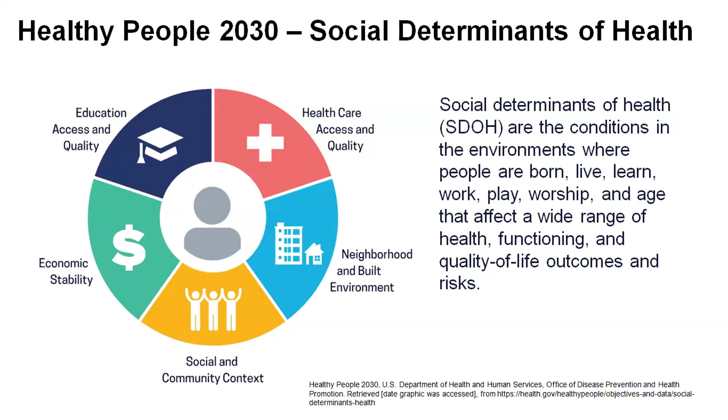buildings do not exist in isolation. They do impact the quality of life, outcomes, and risks. Buildings need to decarbonize to reduce greenhouse gas emissions, mitigate climate change, and improve health and well-being. We need to act for climate, and also we need to act for health. It's an economic, environmental, and regulatory necessity.

Acting on that reduces carbon footprint, mitigates climate change, lowers energy costs, and enhances property value. It keeps us up to date with increasing policies and mandates like green building certifications and building performance standards. It also impacts health and comfort. Green buildings improve indoor air quality and occupants' well-being.

So what does it really mean when we say we need to decarbonize buildings? Decarbonization is defined as the process of reducing carbon emissions from buildings, both operational and embodied. Embodied carbon refers to CO2 emitted during the manufacture, transport, and construction of building materials, plus end-of-life emissions.

While significant progress has been made to understand how to reduce operational emissions, our industry is getting more and more successful at making efficient buildings. There is still a gap in our knowledge and effort toward reducing embodied emissions. Unlike operational carbon, which can be reduced over time with energy-efficient renovation and the use of renewable energies, embodied carbon emissions are locked in place as soon as the space is built.

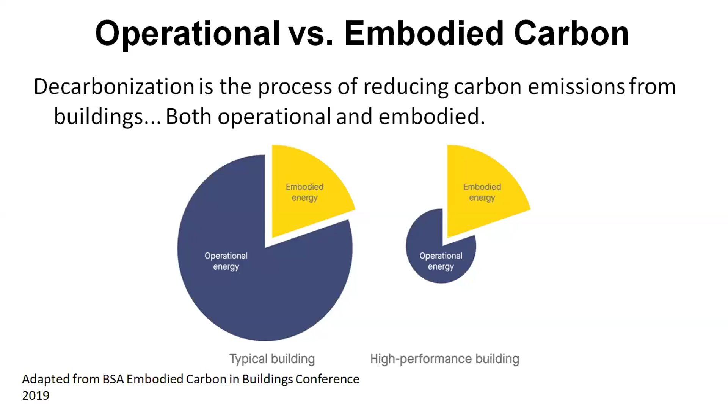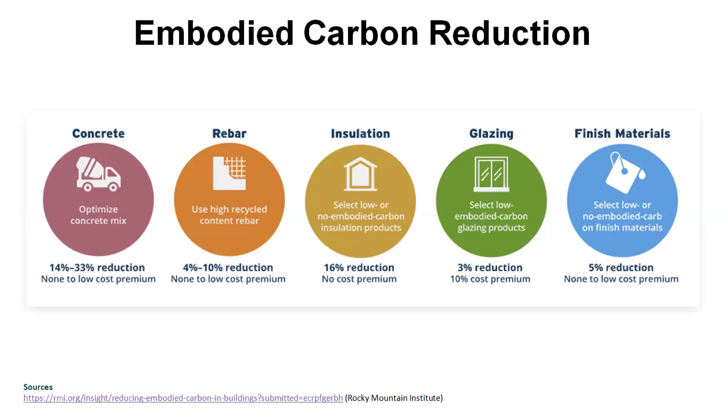Embodied carbon reduction can often reduce material use and project costs, reduce energy consumption in raw material extraction, manufacturing, and transportation, help to meet green building certification requirements, and better position building owners for future code or policy changes that incentivize or require low embodied carbon.

An example of embodied carbon and high impact material could be the three materials that have high impact: concrete, steel, and aluminum. They're responsible for 23% of global emissions. Most of it is used in the built environment.

Here we have an example of different options where we can select different types of insulation that can also impact the embodied carbon of the project. So we can do that through policy design, material selection, and specification. We can guide the built environment to have lower embodied carbon.

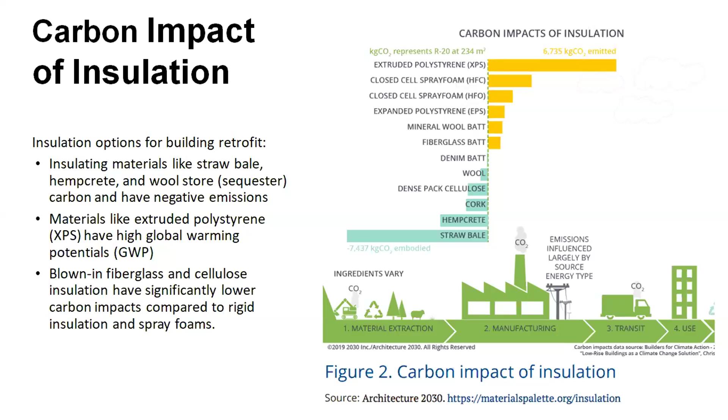Now that we've explored what embodied and operational carbon are, let's talk about how we must act urgently and strategically. And why are we talking about this in the first place? Why do we need to call for this action? Buildings account for almost 40% of global CO2 emissions. That's a huge percentage. We can't meet climate goals without drastically improving how we build and operate our spaces.

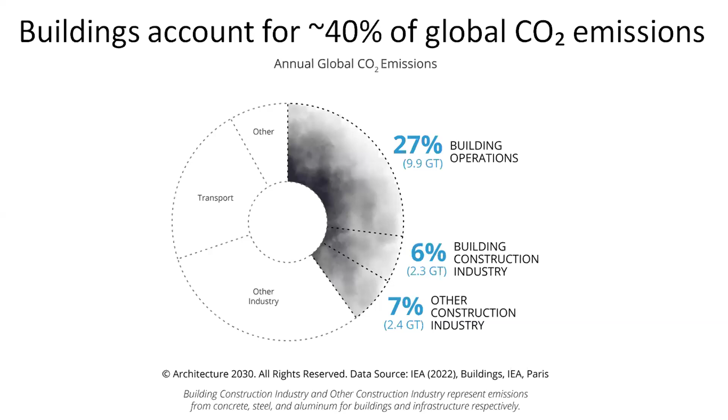Here in Chicago, buildings account for 70% of our greenhouse gas emissions. Nationwide, energy use is the biggest contributor. If we're serious about net zero, buildings must be the focus.

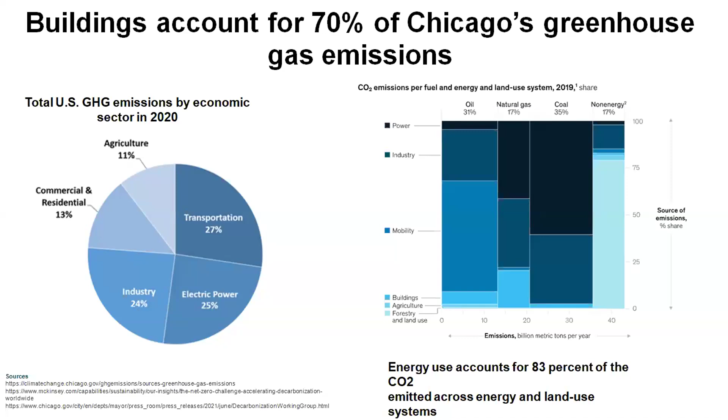In 2050, an estimated 80% of existing building stock will be buildings that were constructed in 2025 or earlier. That means we can't rely on new construction alone. Retrofitting existing buildings is urgent and is an opportunity for innovation.

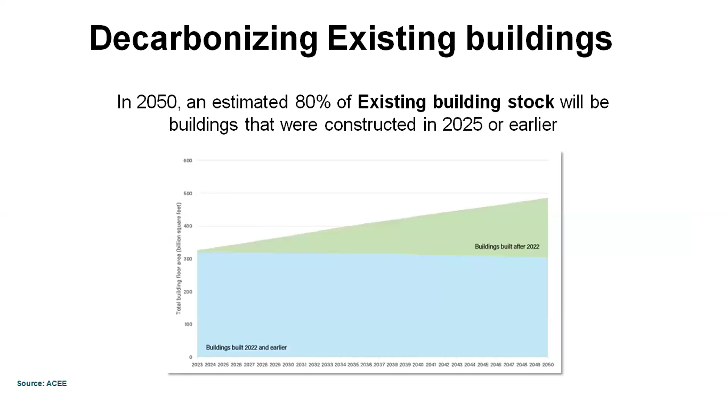We're expecting the floor area of global buildings to double by 2060. So we really need to focus on existing buildings.

So globally, we're seeing a momentum toward net zero commitment. Decarbonization refers to the process of reducing greenhouse gas emissions, particularly carbon dioxide, in order to mitigate the impact of climate change. This can be achieved by reducing emissions from various sources, such as electricity generation, transportation, and industry, using renewable energy, energy efficiency, and carbon capture and storage technologies.

Net zero, on the other hand, refers to achieving a balance between greenhouse gas emissions and removal. This means that any remaining emissions are offset by removing an equivalent amount of greenhouse gases from the atmosphere, such as through reforestation or direct air capture technologies. Net zero can be achieved through a combination of emission reductions and carbon removal.

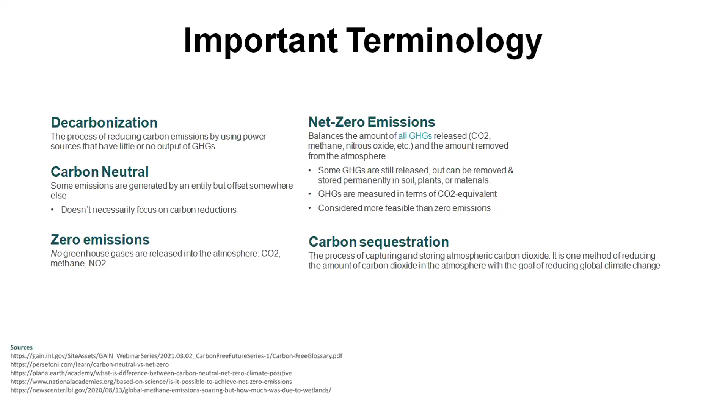In other words, decarbonization is the process of reducing emissions, while net zero is the goal of balancing emissions and removals. Achieving net zero requires more than just reducing emissions. It also involves removing carbon from the atmosphere to offset any remaining emissions.

Cities and states are implementing progressive codes. For example, Boston, Denver, Ithaca, California, each is pushing performance standards. Chicago is moving too, but we must stay ambitious.

Decarbonization isn't just good for the planet, it's also good for business. We can reduce energy use, which means lower operational costs, attract tenants, investors, and buyers who value sustainability, future-proof assets against regulatory risks and carbon taxes, penalties, and fines, and it provides us access to green financing and incentives.

So speaking of momentum, let's look at the big picture. What are global leaders committed to, and what does this mean for us?

The World Economic Forum has net zero milestones. By 2050, we need to have more than 85% of buildings that are carbon ready. More than 90% of heavy industrial production is low emissions, and almost 70% of electricity generation globally is from PV and wind.

Under the 2015 Paris Agreement, nearly 200 countries said that they would act to limit the rise in global average temperatures to well below 2 degrees Celsius above pre-industrial times, and strive to keep it at a ceiling of 1.5.

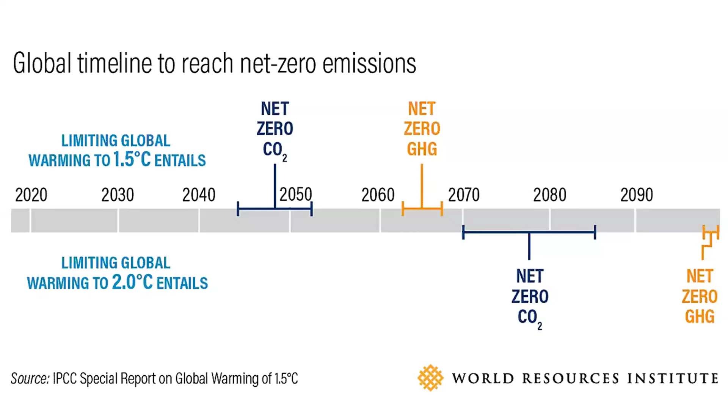Support is also needed to accelerate the rollout of demonstration projects, to leverage private investment in R&D, and to boost overall deployment levels to help reduce cost. Around $90 billion of public money needs to be mobilized globally as soon as possible to complete a portfolio of demonstration projects before 2030. Currently, only roughly $25 billion are budgeted for that period. Developing and deploying these technologies would create major new industries as well as commercial and employment opportunities.

Energy transitions have to take into account the social and economic impact on individuals and communities, and treat people as active participants. The transition to net zero brings a substantial new opportunity for employment, with 14 million jobs created by 2030 in our pathway, thanks to new activities and investment in clean energy.

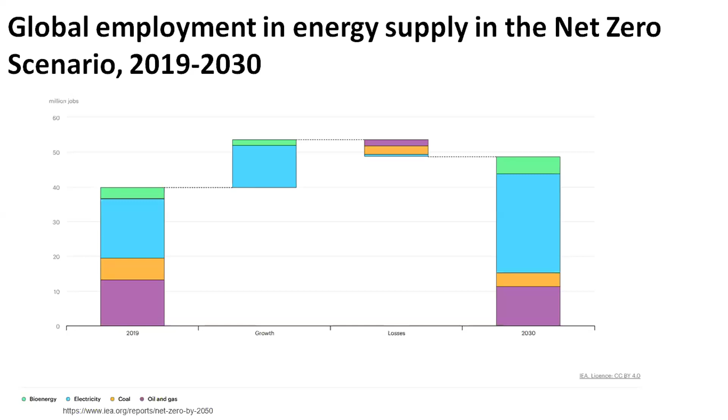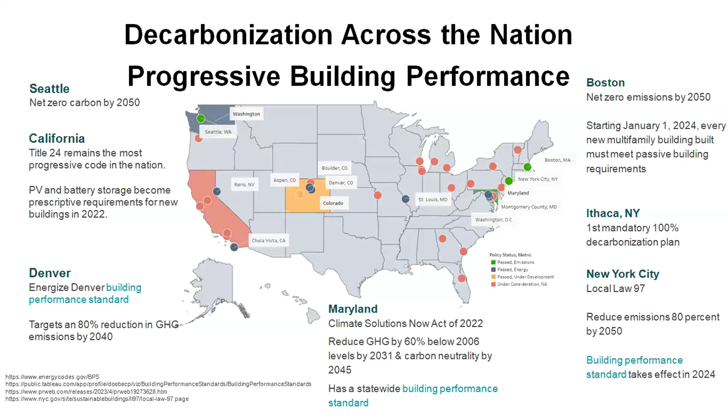We can see here across the nation what the decarbonization process is for progressive building performances in different states. Governments are pushing for faster decarbonization. We have New York City Local Law 97, for example, different building performance standards, net zero commitments across the nation. Illinois has made progress in reducing carbon intensity by 20%, looking at the timeline from 2000 to 2020, but we still rank 10th in the nation for carbon-heavy electricity. This highlights the need for clean grid strategies and electrification.

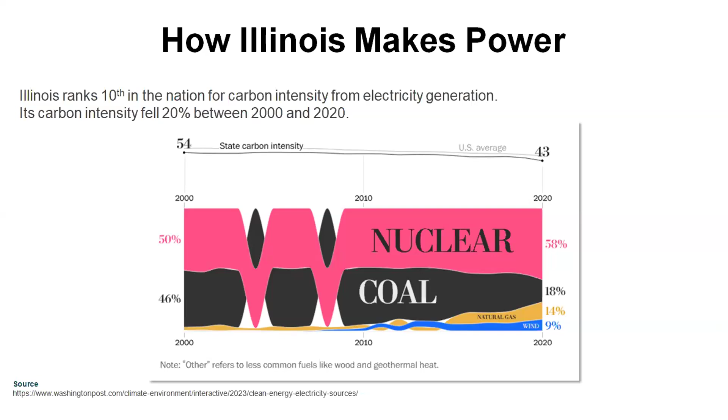I'm not sure if everyone had a chance to look at the news recently. For April 2025, there was a power outage in Spain and Portugal, blamed on grid instability. This recent blackout is a wake-up call for all of us. As we electrify everything from cars to buildings, we also need to focus on resilience. Sustainable buildings must be low carbon and grid smart as well. We need reliable power. Investing in storage and batteries is really important.

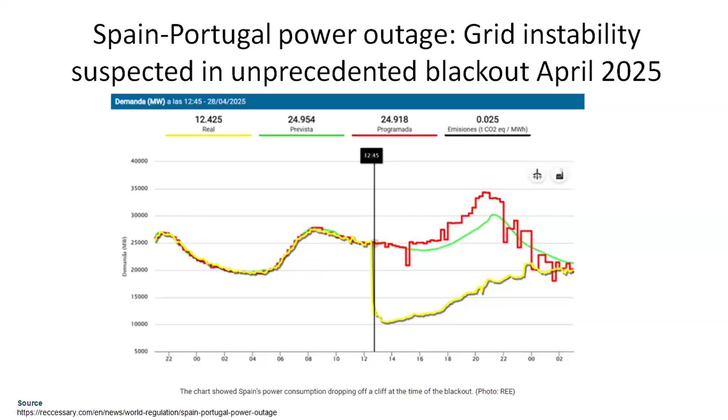There are key strategies for decarbonizing buildings, which are energy efficiency, renewable energy, grid integration, building electrification, tackling embodied carbon, and always stakeholder engagement. Every project needs a tailored approach, but the path is clear.

A question we often get is where to start. The low-hanging fruits are usually energy efficiency first. Reduce your energy use through retrofits and smart technologies. Replace gas systems with heat pumps and renewable energy sources, and provide some kind of renewable energy on site and some sort of storage for resiliency. Embodied carbon reduction would be through selecting materials that are low carbon and focusing on circular design.

But the question again is how and where to start. How do we create a roadmap to decarbonize our projects? The advice usually is do not reinvent the wheel. Use an existing framework that best suits your project. That is where green building certifications can really help.

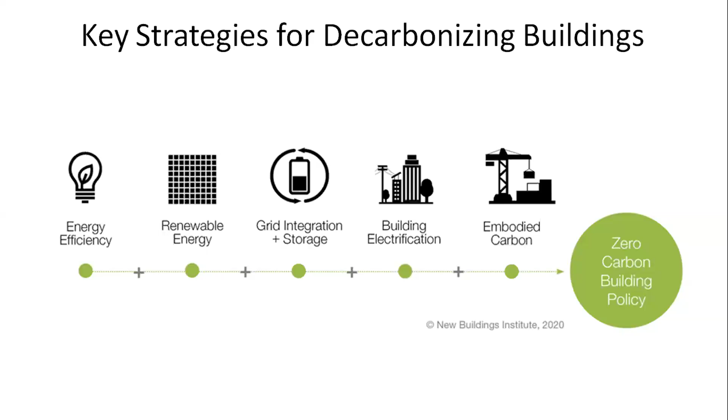We have so many green building certifications out there. Green certification can act as a roadmap for carbon reduction by providing a framework and standards for organizations to assess, reduce, and offset their emissions, ultimately leading to a more sustainable and environmentally responsible business model. They help businesses understand their current carbon footprint, set goals for reduction, and implement strategies like energy efficiency, renewable energy, and carbon offsets. A framework helps us measure, improve, and verify our progress.

I have worked with several green building certifications. One of my recent favorites is the new tool from the GBI. Their Green Globes Journey to Net Zero certification advances decarbonization in the global built environment by empowering all commercial real estate owners to evaluate performance and implement impactful change. It turns complexity into action. I use this with clients to guide real results.

This is a two-in-one certification. There is the Journey to Net Zero Energy, which tracks and reduces buildings' energy consumption through a comprehensive EUI measurement system, achieving a balance between the energy consumed and the energy generated from low to zero emission sources like solar, hydro, geothermal, and wind. And the Journey to Net Zero Carbon, which tracks and reduces your buildings' carbon emissions and transforms your buildings' environmental impact, reducing greenhouse gas emissions, by leveraging low to zero emissions energy sources and life cycle thinking.

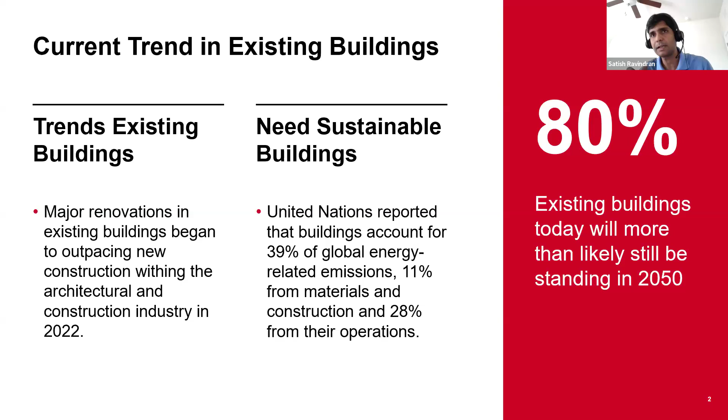If you look at it, 11% comes from materials and construction, 28% comes from operations. This means that it's not just necessary to construct a new building with new codes and technologies, but you also have to take into account how your existing building portfolio is performing. Sumaya also pointed out earlier that 80% of the building stock is going to remain standing after 2050. So, more power to decarbonization.

As we dive deeper into decarbonization, there are complex questions for the built environment, and these are for two separate groups of stakeholders: one is the operator, and the second is the investor. The operators are trying to understand the day-to-day performance of the building, identify what kind of hotspots and emissions, and where they are coming from. And how do they develop a business case for the higher ups? When presenting to their higher management, how do they develop a roadmap for their property?

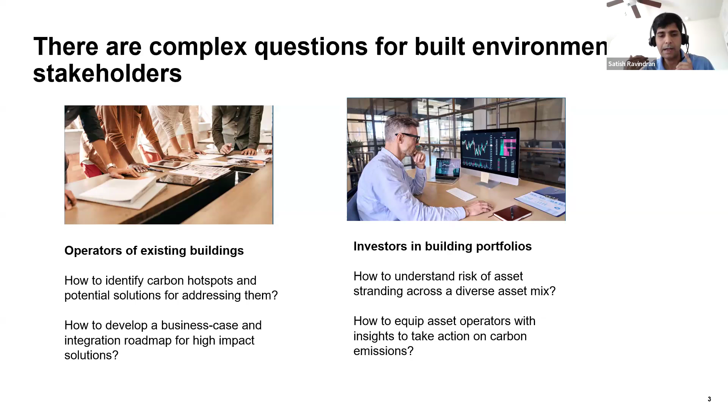Now, the investors are looking at this from a different angle. They have a portfolio of assets, and they're trying to understand which of the assets are at risk of getting stranded, meaning whether it's the physical impact of climate change, a transitional impact, or a regulatory impact. They're trying to understand which of these properties they need to tackle first.

That's where I think a clear framework would help, because it provides clarity around aligning the stakeholders together. It helps ensure alignment along certifications and ordinances, and it also helps with strategic planning. So you have an asset in mind, a property in mind - what kind of measures do you have to implement, and when do you have to implement them? Finally, it also gives confidence to an investor because it's all data driven.

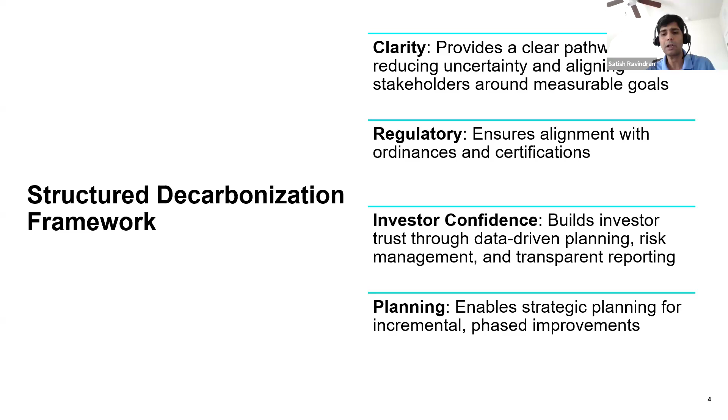Now, the first step is laying the foundation, which is basically getting all the stakeholders together and knowing why you should decarbonize. Why are you doing it - whether for regulations, for ROI standpoint, or for LEED? You need to understand exactly what the goal of decarbonization is. You also need to engage the right people so that you don't have roadblocks further down the line for budget or similar issues. And you also need to look at regulations - what kind of territory you are in, whether your building is located in New York or California, and what kind of regulations apply there.

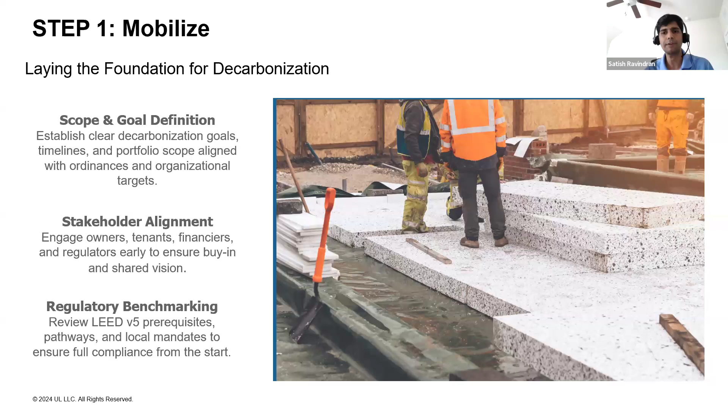The second step is measure. This is where an energy assessment or energy audit would really help. It is talking to your building operators, looking at the existing operation of the buildings and looking at the current baseline of the building. This is where an end use breakdown really helps, because you need to break down your end use of where your energy is going.

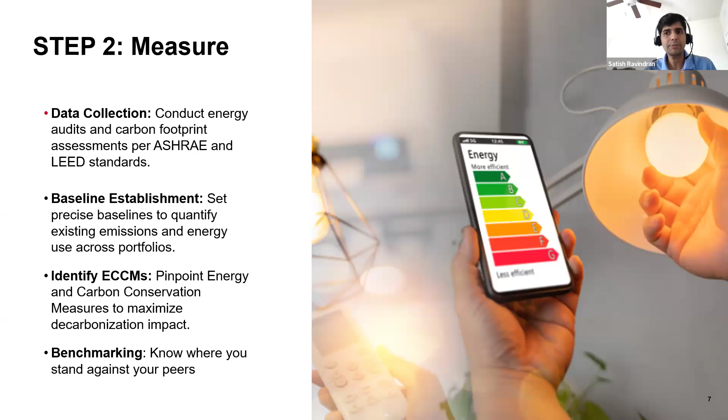You also need to identify energy conservation and carbon measures. Once you have this in place, you can also go to your Energy Star Portfolio Manager and start benchmarking your building, to know where your current energy use intensity is coming from.

The third step in this process is model, which is where a decarbonization tool will help, because modeling is all about turning your data into strategy. This is where a modeling tool helps in pinpointing what kind of actionable steps you can take and when you take them.

For example, if you have a boiler today and you want to convert it to electric boilers, you need to know exactly when to make that conversion and how that looks in your 2050 trajectory. That is where using a decarbonization tool really helps, because it helps you prioritize your ECCM measures. It gives you a timeline for implementation, and it also provides a business case for quantifying your ROI numbers.

As I said, we use a decarbonization tool, but there are plenty out there in terms of what they provide and what kind of robustness they offer. But overall, all decarb tools should be able to achieve the following.

One is to give you accurate carbon emissions for your property or for a portfolio, whether it's with the impact of measures or without the impact of measures. So you should be able to compare how your building looks on a 2050 trajectory.

Then the decarb tool should also help you get the assets all the way to net zero by early retirement of old equipment. What that means is that if you have old equipment standing today and it is a very critical piece of equipment—let's say you're a pharma company with an old, huge industrial dryer sitting there, and people are wondering when it would break down—do you have to replace it this year, or in 2030 because it's so critical to your operations? That is when a decarb tool would help you.

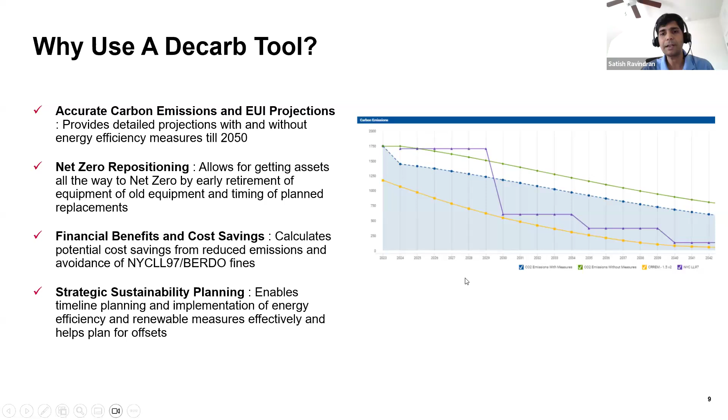Finally, a decarb tool also helps you towards ordinances. As you see here, it also helps provide comparison to your CRREM pathway. CRREM stands for Carbon Risk Real Estate Monitor. It is a pathway developed for real estate portfolios. You have SBTI pathways, or you could model any pathway, and you have to measure your building against those frameworks.

Step 4 is monitoring. This is where real-time tracking of your building through an energy information system comes into play. There are plenty of energy information systems out there that are third-party provided, but all of them should be able to help you monitor your utilities on a day-to-day basis, whether it's natural gas, electricity, or water.

It should also be able to tell you if any issue or spike happens in your day-to-day usage. And it should also be able to tell you how your property is performing on a monthly basis and on an annual basis as well.

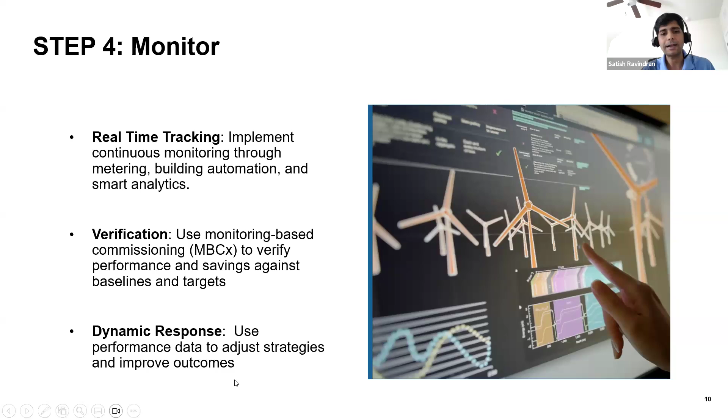We also recommend verification, which is basically doing a monitoring-based commissioning of your energy information system. What that means is that you need a third party to come in and verify if your actual information system is working well, if the dashboard is connected to everything, if your building automation system is actually tied to your overall energy information system. It also helps you adjust your strategies dynamically.

One thing I want to point out is using Energy Star. It's a shame that this program might be scrapped, but hopefully it stays, because I have found it so useful for so many property managers and building owners when we're recommending this kind of roadmap. A lot of ordinances are driven by Energy Star, whether it's your local city or state level ordinances that require performance standards through Energy Star tracking.

Energy Star certification by itself is so powerful because it gives you marketing rights for your building, it gives you that sticker. And a lot of tenants are looking at Energy Star when they look at leased properties, and they look at specific requirements with respect to Energy Star. And if you have any internal company goals, that's also driven by Energy Star. So this is really the place where you can look at your building on a day-to-day basis.

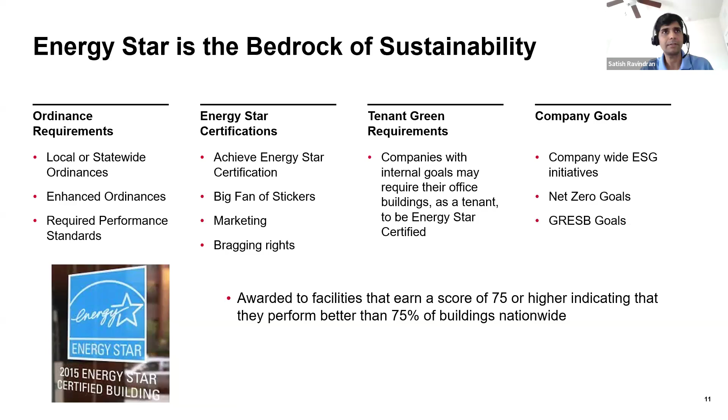The final step on this is manage. And manage meaning, how do you manage your building on a long term? How do you make sure you institutionalize your best practices across the period? This is also about managing your portfolio for LEED or for any other regulations, whether it's GRESB, whatever reporting is required, whether it's 5 years or 10 years, how much does it renew? How do you overall manage a property? That's the final step of your framework.

I wanted to give you a couple of examples of how we have applied this framework. The first was with a pharma manufacturer who had about 5 buildings in their portfolio in the US. I'm going to focus on one of the properties in Michigan. It's not an end-to-end application of all 5 frameworks I discussed, but they came to us already having completed the mobilization phase, meaning they had already met with the stakeholders and knew what the goals were.

They came to us as the first step as solution validation, which meant that out of the 50 or so solutions they had identified for their property, they wanted us to validate which were the most important solutions. This was done by site assessment. Then they wanted us to do a viability review for each solution, and an impact ranking for the measure in terms of carbon, payback, and budget. We had to do a business case for the solution, pointing out direct and indirect benefits. Finally, they wanted a roadmap created.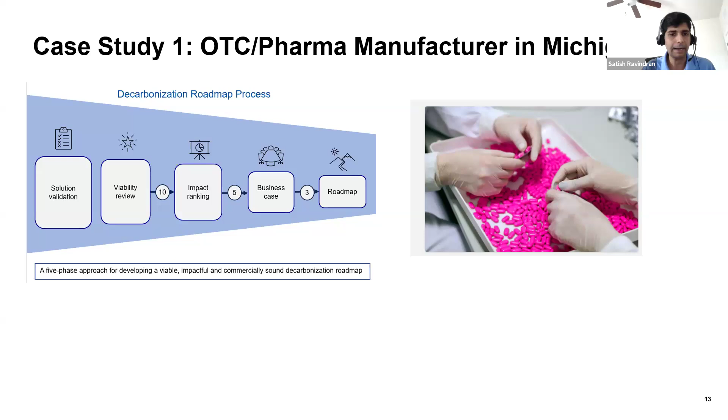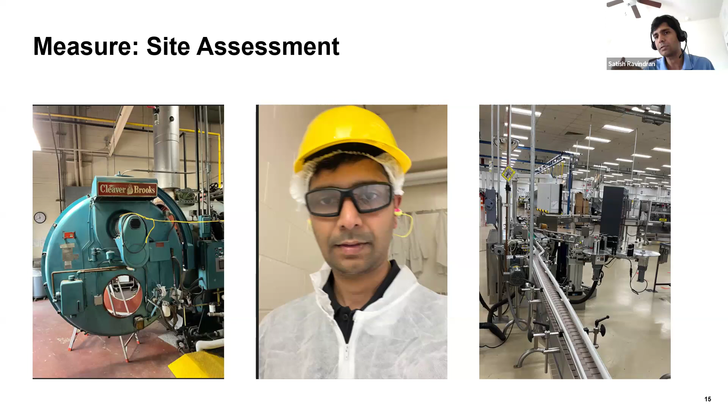These were the list of 50 solutions they had already got from their stakeholders, from their day-to-day engineers, operators, and whoever were in their factories. They had come up with a list of the top solutions they would like to change or propose, whether it's boilers, air compressors, walk-in coolers, they have so much industrial equipment. So where we came in is we went on site to that Michigan plant, which has 6 or 7 buildings inside that campus, and we took a look at each and every piece of equipment to decide how does the end use look like, where does the maximum amount of electricity or natural gas go.

After drawing up the baseline, we did the model phase, which is basically how do we convert these numbers in terms of carbon, and also how do we sit with the stakeholders to understand how a solution might be suitable for them. For example, they had 4 chillers located on the north side of the plant. Even the 4 chillers running at full capacity was not enough for them. So what we suggested was upgrading their 4 chillers with new chillers, and also put a VFD on the chilled water pumps. Now we might think this is a straightforward solution, that they just need to do it right away.

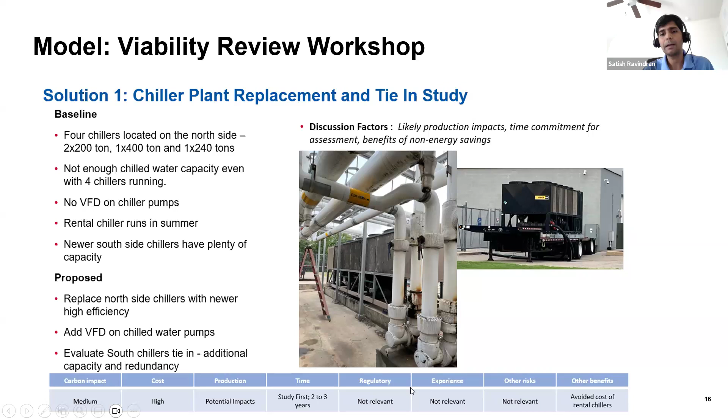But making it applicable to a pharma company is a whole different deal, because you need to look at the carbon impact of the solution, the cost of the solution, the potential impacts it can create to production, and then there is also a whole regulatory FDA compliance requirement for pharma. So we need to make sure we're considering all the metrics when discussing a solution.

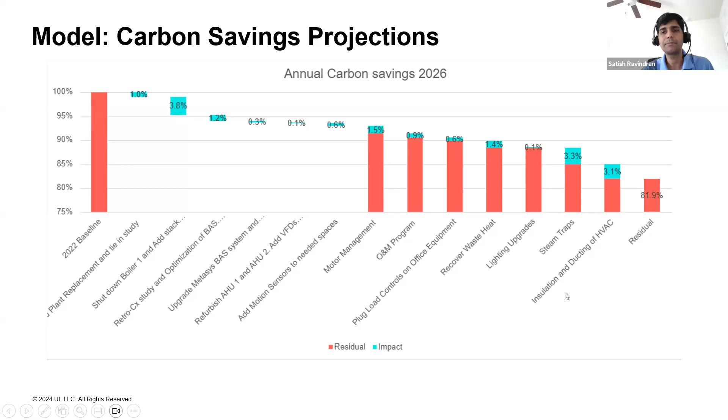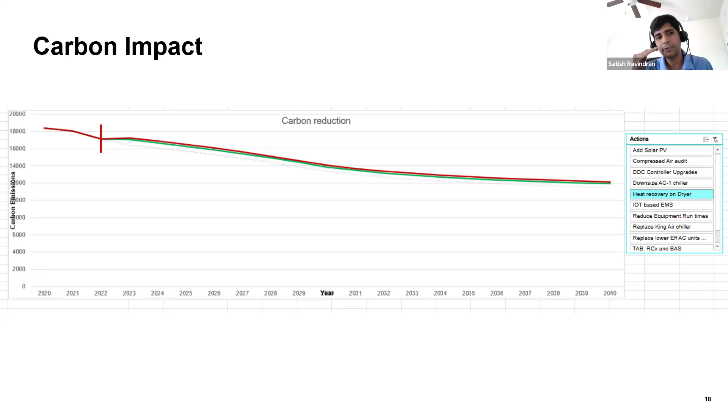You can see here that we used a decarbonization tool to figure out what is the existing baseline, and then what all solutions can apply till 2040, and how much percent of carbon are they reducing. We gave them a toggle of solutions, and they can click on each solution, and it'll show them how much carbon reduction comes from each solution from now till 2040.

Then once we had the viability discussion, we had to rank these based on cost, payback, and carbon. You can see here we've given these ranges for these solutions - one is the carbon saving, whether it's low, medium, or high, whether it's the cost savings, low, medium, or high, and then this was the payback. So we laid out each solution based on that.

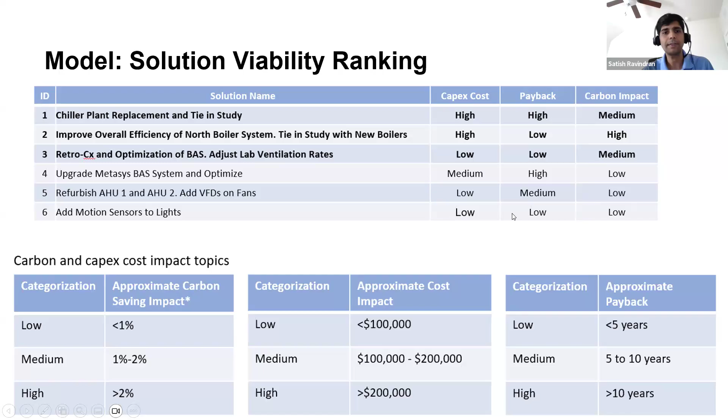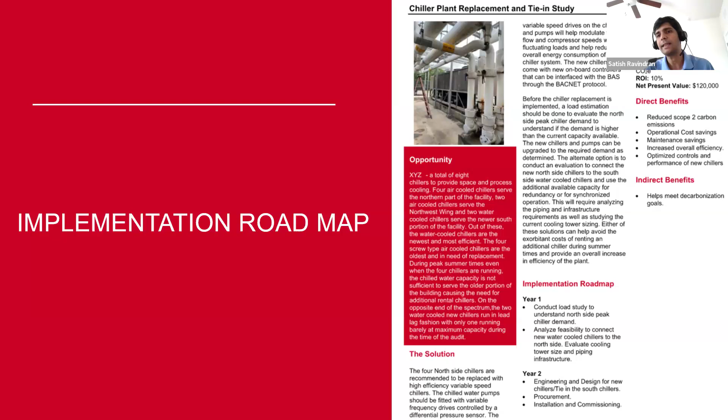Finally, we gave them our implementation roadmap. So we kind of laid out what was the challenge, what is the solution, and then how do they lay out the roadmap for this, what are the benefits of a particular solution, what are the indirect benefits, and then what are the financial cost results. So it was like a one-pager roadmap. We also gave them an implementation timeline on when they can take the solution to design.

This is the second of the case studies where we worked with a real estate property management firm. This was a little bit different type of case study because they were looking at a portfolio of buildings and wanted to know which of those properties would get stranded first. I have an example here in Chicago where we did a decarbonization assessment for one of the buildings.

As with the previous case study, this particular property manager had already gone through the mobilization phase. They had already met with their stakeholders and knew exactly what the decarbonization goals were. They wanted us to come in and help them implement low cost, no cost measures from retro-commissioning, and then what are the CapEx 10-year capital plan measures, what are the upgrades, how does it look on the electrical side of things, and then compare that roadmap to the CRREM pathway, which is carbon risk real estate monitoring.

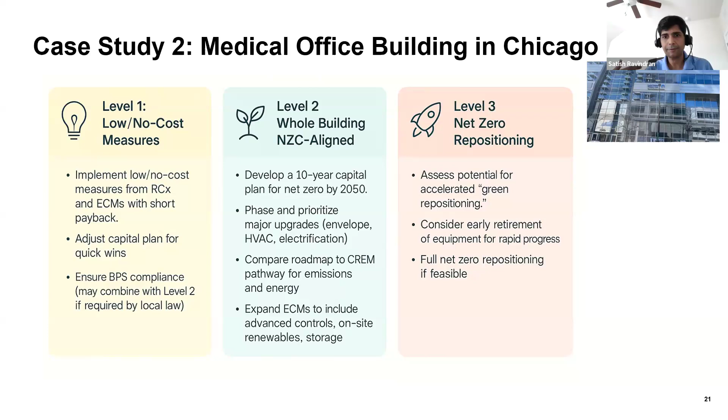Finally, they wanted to reposition. They wanted us to look at what are the immediate measures that can be applied for repositioning. So what that means is what equipment can be immediately electrified, and how does it look from a carbon roadmap standpoint?

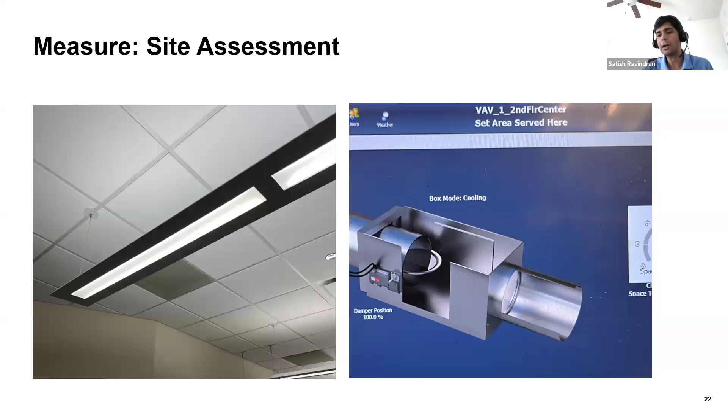This is where we did the site assessment. We went in and looked at the lighting, the cooling, the VAV boxes, the whole deal on the office property. Then we came up with a list of solutions pointing out what is your implementation cost, what is your payback. They also had a tenant versus a landlord distinction for how these measures applied.

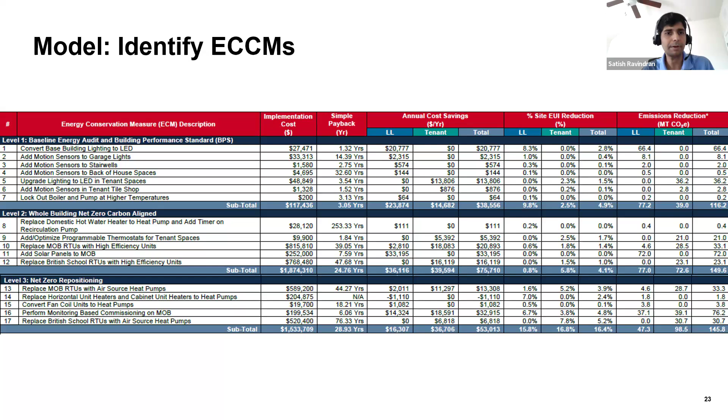So we broke them out and provided them with a clear summary picture: here's your identification list of carbon measures. Then we used a decarbonization tool to figure out which of these solutions made the most sense and when they have to be implemented.

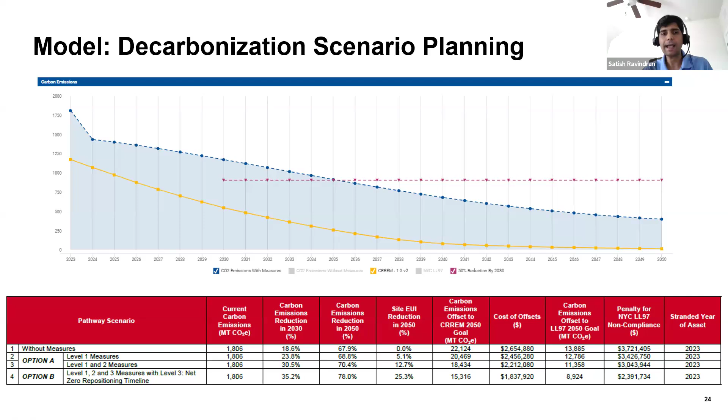Finally, I wanted to talk about LEED a little bit because LEED really has marked a turning point in sustainability, at least the latest version for the built environment. It's very heartening to see that decarbonization is at the very heart of LEED this time because it provides a pathway for 50% of the total points to be achieved through decarbonization credits, which is incredible.

So I looked through LEED V5. There are credits for greenhouse gas reduction performance. Carbon projection is now a prerequisite. It's a big deal because right now all building owners going through LEED O+M have to know exactly how their building is performing through 2050. Strategic Decarbonization Roadmap also gets a lot of credit. Monitoring-based commissioning, again, is indicated in LEED right now, and you actually get extra points for monitoring-based commissioning. It's very, very heartening to see how LEED has turned decarbonization into a core pillar.

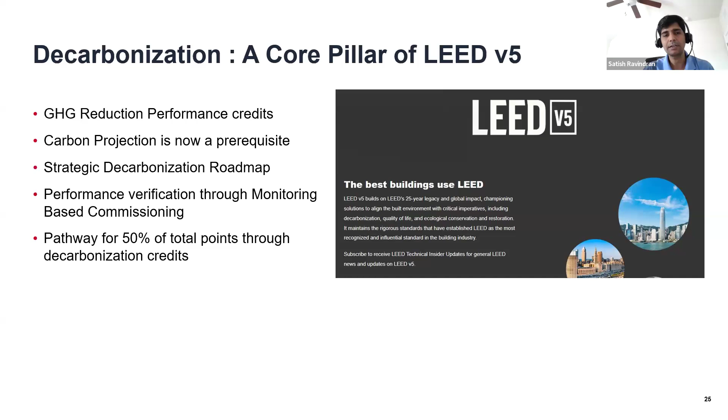So just to summarize what we talked about: decarbonization is a journey. It's not a one-time audit solution. It's a journey, it's a roadmap, and you need a framework for that. So you need to go from Mobilize all the way to managing your building stock.

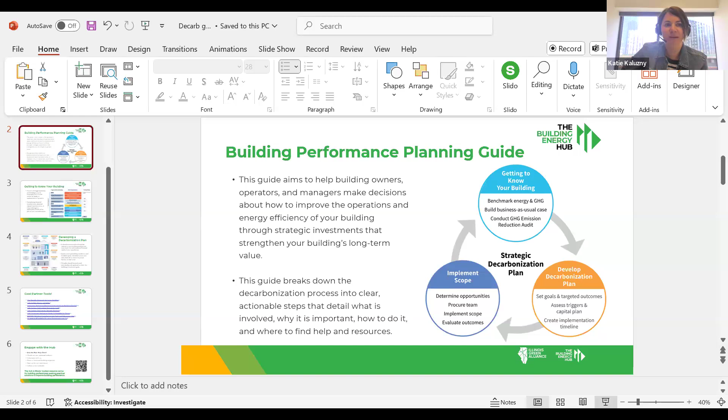of partners. We launched this project a couple of years ago as a way to bring all the best tools, resources, and guidance to existing buildings throughout Illinois. We really wanted to make sure we're addressing this industry as well as what we do for new construction and our project teams.

So really the audience for the Building Energy Hub is owners, property managers, contractors, building operators, and really creating some great tools and resources. There's a million websites where you can find things. Samaya and Satish talked about some great resources today, but we're really trying to bring these things to our members and to the building community to curate some of the best practices out there so you don't have to search the whole internet.

And so we worked on a new building performance planning guide with our friends at Slipstream that takes a lot of the things that Samaya and Satish talked about and kind of meets any building owner or operator where they are in their journey. I'm going to share a little bit about that, but then I want to get to the Q&A.

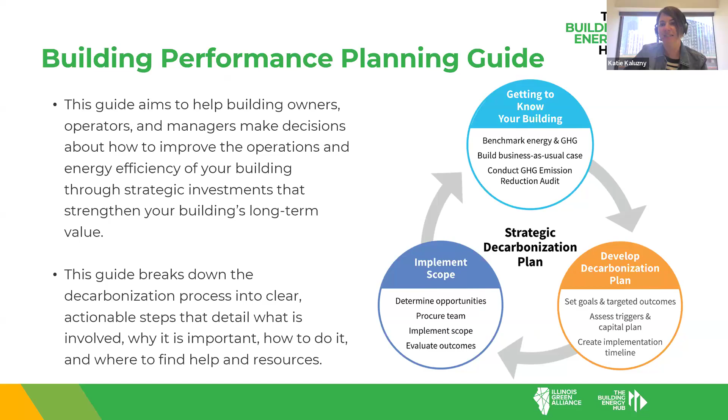So just wanted to share this guide. It just launched a couple of weeks ago, and it really helps owners and operators make some decisions through a journey that kind of continues - getting to know your building, developing your decarbonization plan, and implementing that scope - and breaks this down into some clear and actionable items to figure out what you should do first, next, and how to prioritize all of those items.

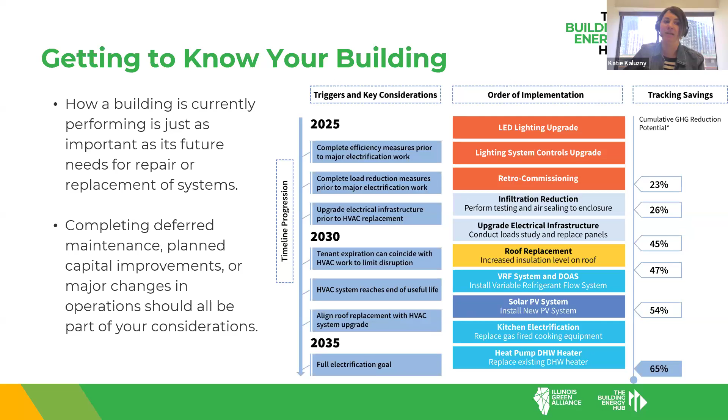Really looking at what are some of the key triggers and considerations over time - not just things you're going to do right now, as Satish mentioned. There's a lot of things that you need to mobilize now, but also some items you might think about implementing over time and what those capital costs and improvements might be.

We have some really great graphics. These are really small on the slide, but you'll get these slides afterwards, and I think my colleagues are putting some links in the chat as well. So really looking at all the different prioritization of where you're trying to work on your building and working through this guide.

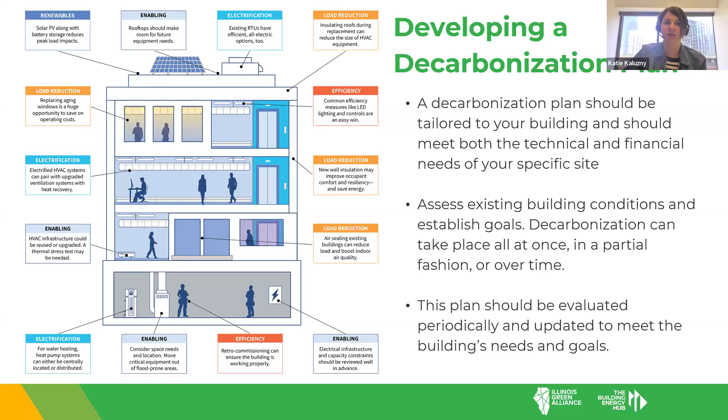What the guide also does is talk a lot about what questions you should ask of someone you're working with on this - how do you prioritize items, who should be involved along the way, and really the key considerations as you're moving through the different parts of your decarbonization planning.

And we also have a help desk. So if you have any questions, you can call our help desk with the Building Energy Hub, and we can connect you to really great experts in our industry that can help you navigate your journey. So I'm going to end it there and turn it back to our moderator to go into the Q&A.